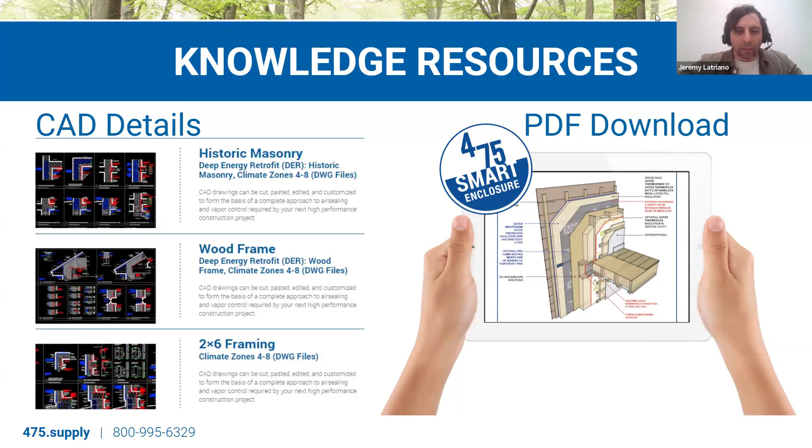Okay, hopefully you guys can hear me. Perfect. You'll see my cell phone here, starting in the conference room, walking out into the main office space.

I mentioned we work with a couple of different European manufacturers to supply skylights here in the US and Canada. The main product we've featured in our new office is Lamilux skylights, which are manufactured in Germany. You can see a large one featured here over our main working space.

The PR60 is a knockdown system, otherwise known as a mullion and transom system. It's delivered to the job site as a kit of parts. This kit of parts includes triple layer insulated glazing, thermally broken aluminum profiles, and insulated flashing connections to the existing structure. It comes together on site to provide a thermally continuous and quite elegant skylight solution.

In this case, you can see that we feature three glass fields, one of which is an operable ventilator flap, which also allows for fresh air to enter into the space. What you'll notice about this space is that on three of the four walls, we share a party wall with the neighboring structures.

And so we weren't really able to utilize many windows to bring in natural light, so we relied heavily on these skylights to do so.

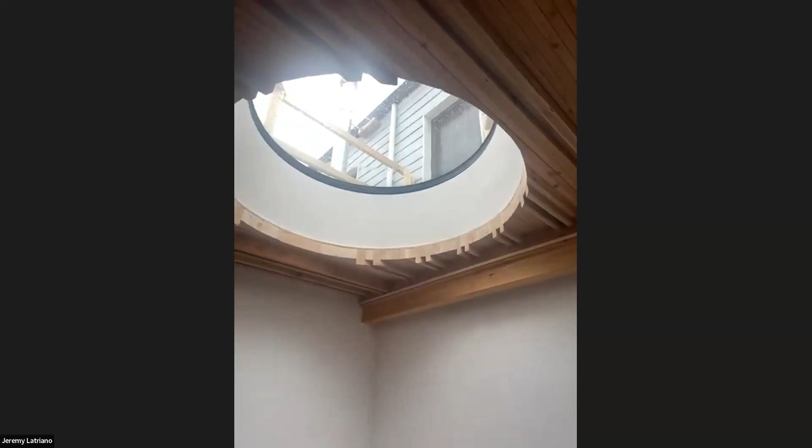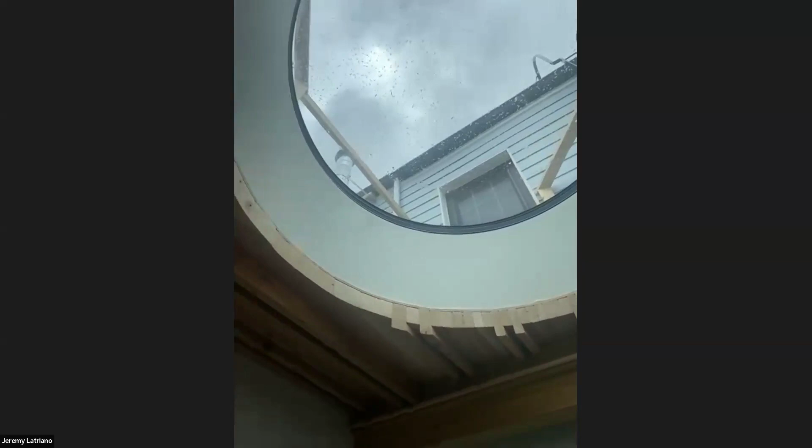As I pivot to the front of our building, you can see here the Lamilux FE Circular, a nice design option for projects that are looking to utilize a circular skylight. You can see this unit skylight comes pre-assembled with triple layer glazing and a thermally broken frame. It also features this insulated curb, which you can see in the white well beneath the skylight. That curb is delivered as part of the skylight assembly, and it allows you to easily install the skylight and detail your water, thermal, and air control to the surrounding structure. I'll talk a little bit more about that detailing in my presentation.

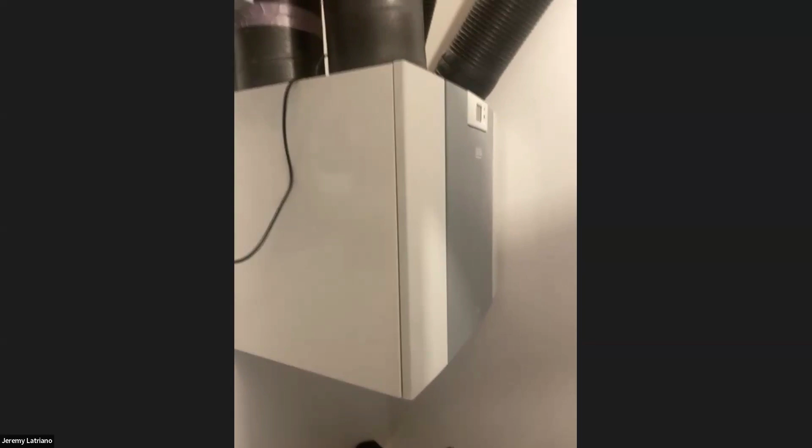Getting away from the skylights here for a second as we move into our mechanical room. Our company doesn't only deal with skylight products. We supply a variety of different solutions to help buildings reduce their energy usage for heating and cooling, and also to improve the comfort and efficiency of their spaces.

This is the Brink Energy Recovery Ventilation System, which supplies air continuously to our office space in spaces such as the areas where we work and our conference room. It also constantly exhausts air from areas such as bathrooms and kitchens, and so we are able to achieve very high indoor air quality. While this system is exhausting air, it's preserving some of the heat from that air in this box, so that as air is being exhausted, we're preserving the heat from that exhaust air. Then when we supply air through these insulated ducts, we can see that the supply air then recovers some of that heat, thereby allowing us to ventilate constantly without having to worry about compromising our energy performance.

Just want to take you downstairs quickly to feature our truth window and some of the materials included in our enclosure. As I mentioned, this enclosure is continuously air sealed and insulated, so we have very low energy usage for heating and cooling, and we're able to quite easily get to net zero energy usage thanks to the PV on our roof. The optimization of the enclosure can be seen here in the truth window, which gives you a little bit of a peek behind our finishes.

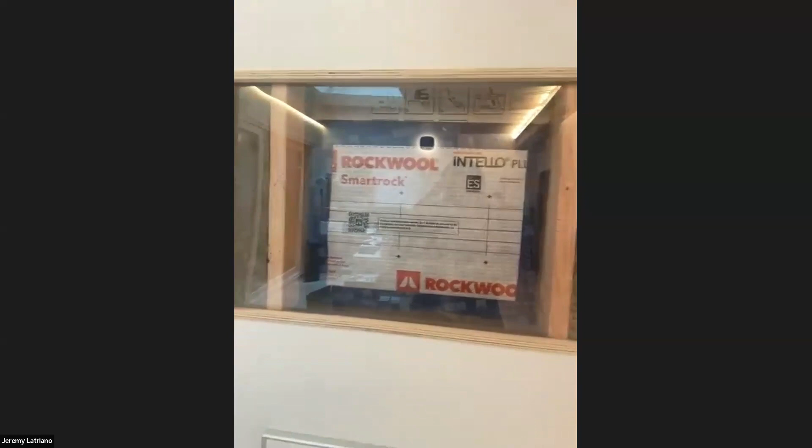Here we show a laminated mineral wool product from Rockwool called Smartrock. This product is one of the newest that we've launched in the US and Canada. It has a semi-rigid mineral wool insulation board with an interior air control and vapor variable membrane laminated to it, so it can be easily installed and then taped at the seams using this blue tape to check off two boxes, insulating and air sealing in one. This is the general principle of how we achieve such high performance via this air tightness, which is continuous via this membrane to the roof where it connects to our roofing membrane, and then also to the slab where it connects to our sub-slab poly.

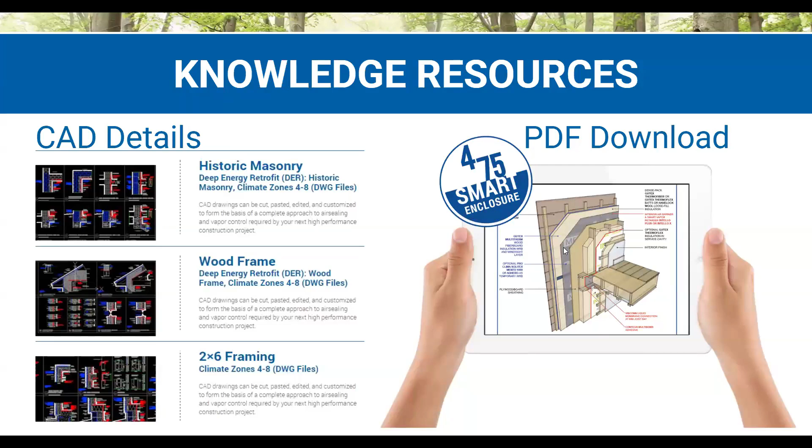Some of the products I highlighted are shown here. Our company is an e-commerce business, so our store is our website, where you can find more information on the products we supply. To summarize, we have the air and vapor control system, supplied primarily from Pro Clima, the manufacturer of the Intello Plus membrane I showed you in the truth window, as well as a variety of other interior and exterior tapes and membranes used to achieve high levels of air tightness and vapor control.

We also supply a sub poly wrap from Stego, so we can help seal all sides of your enclosure. We supply insulation through a German manufacturer, Gutex, who produces wood fiberboard insulation, a rigid board exterior insulation and WRB product with exceptionally low embodied carbon. We also supply the Brink Energy Recovery Ventilation System, a centralized ERV, and we can also do a decentralized through-wall ERV through German manufacturer Lunos.

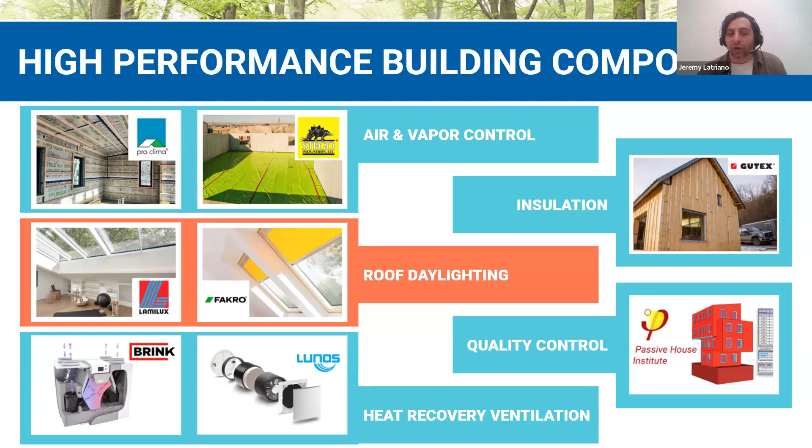The products I'm here to talk about today, and more to discuss general principles around, are our roof daylighting products: Lamilux, which we showed you around the office, and Fakro, a Polish manufacturer of deck-mounted skylights specifically. Since I didn't get to show you those, I'll describe them briefly.

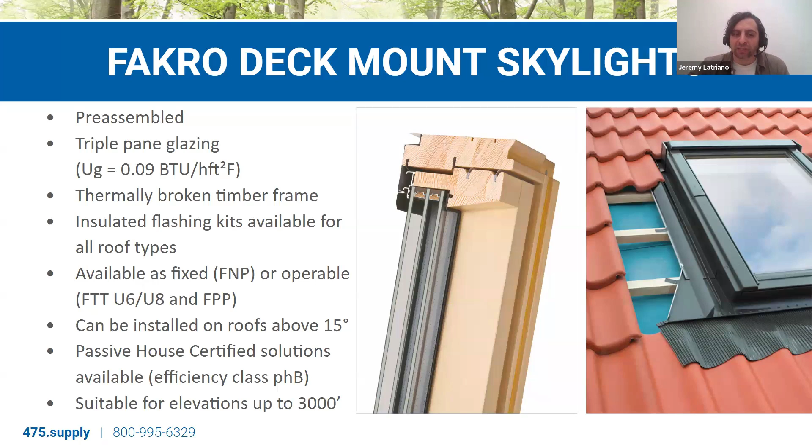While Lamilux is intended for low pitch and flat roof applications, the Fakro skylights we supply can be used in pitched roof applications. These skylights feature a thermally broken timber frame and triple layer insulated glazing. They can be supplied as fixed or operable, and we have some stock options available here in the US. In addition, we can also do walkable skylights through Fakro, also triple glazed with thermally broken extruded profiles, up to about 4 foot by 4 foot in dimension.

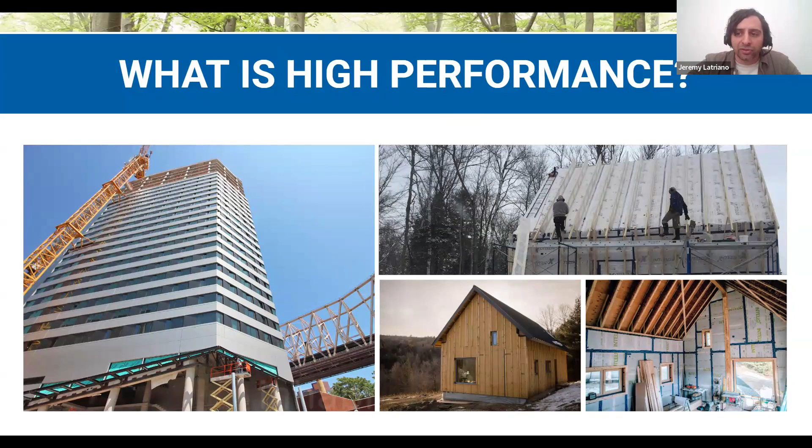Tight envelope, absolutely. Air sealing, particularly, is the most effective way we can reduce mechanical heating and cooling requirements, even more so than insulating. Air sealing also maximizes our comfort as we eliminate drafts, and it's going to improve the durability of our structure as controlling airflow limits vapor movement.

And energy efficiency, yes, that is the big one as well. We talk about all these different characteristics, air control, insulation. One of the big things that we're trying to capitalize on is energy efficiency. When we do achieve very high levels of air tightness and thermal protection, we're actually able to get to a point where mechanical heating and cooling loads are minimized, so that they can be supplied electrically and offset using renewables. So also really good answers there.

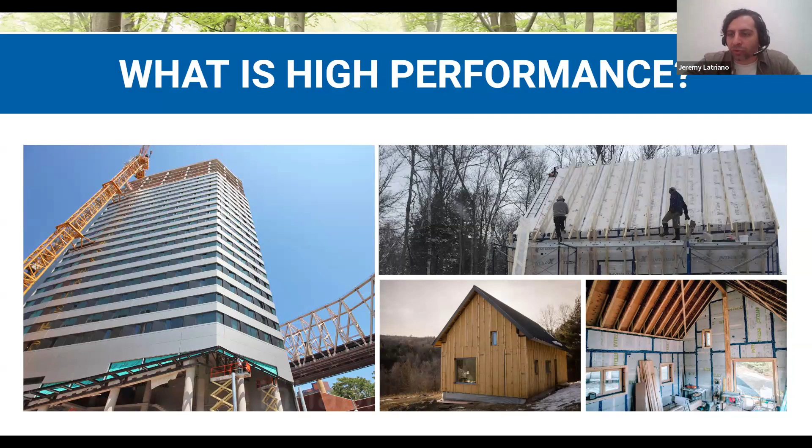Some other things that we as a company consider as essential qualities of a high performance building. The first is comfort. These buildings, high performance buildings in general, are going to be exceptionally comfortable. This is because they embody some of the characteristics that you guys mentioned. They're continuously air sealed, so there's no air leakage, no draftiness, no temperature asymmetry. Similarly, because they're insulated, we don't have any cold spots or any cold surfaces. We'll talk a little bit about the effects that those can have on comfort.

High performance buildings can be very healthy. This is achieved one through material selection. Natural materials with low embodied carbon generally are going to off gas less, have less harmful ingredients, and for that reason will aid in interior health. In addition, because these high performance buildings are continuously ventilated, as I showed you guys with our Brink system, these buildings also provide very high levels of indoor air quality because we're constantly exhausting old stale air and any contaminants or airborne dust that might be floating around our space. And then we're also supplying fresh air, which we can filter and ensure that we have very high indoor air quality.

These buildings are resilient because they manage water, as we mentioned. They also control air and vapor very effectively, and so they're built to last. This is big, as the most sustainable building is an existing building. So we want to be building our structures to last for 100 years or more wherever possible.

This one's a little bit maybe controversial, but we like to think that these buildings can be affordable, particularly air sealing, which, as I mentioned, has a very disproportionate effect on energy usage and comfort, and can be added to most buildings without creating a significant impact on budget. And all these principles that I've mentioned can be applied to buildings of virtually any geometry, any design. So there's no reason why these buildings can't be beautiful. I think with sustainable buildings, sometimes we get caught in this trap of thinking that they have to appear a certain way, they can't be designed as flexibly. But in reality, the principles I'm going to talk about today are not limited by design, generally speaking.

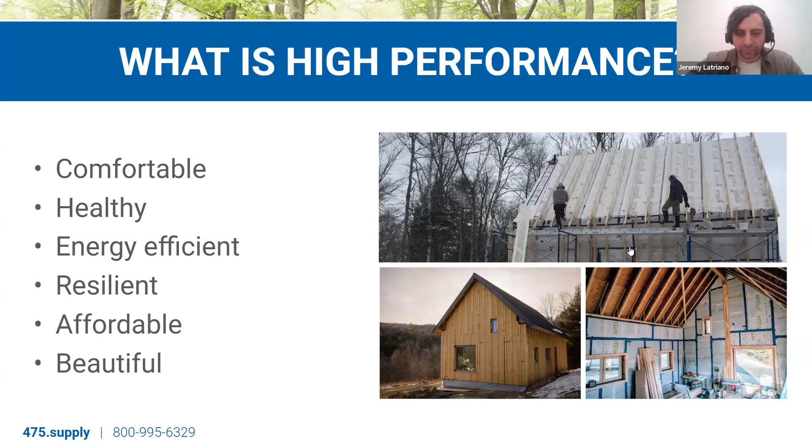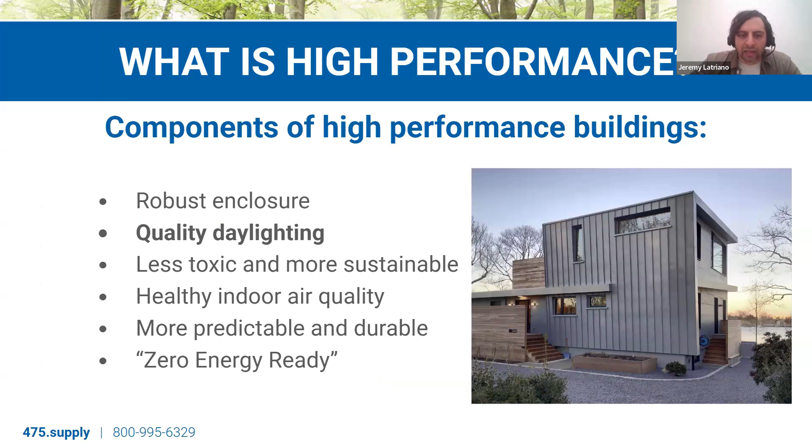So just to put some of these qualities into definition: quality daylighting means that first we have a balanced window to wall ratio.

Anytime we have a penetration in our enclosure, whether in our roof for a skylight or in our wall for a window or door, we are inherently creating a thermal weakness and an opportunity for air leakage. So we want to be very considerate of how we're detailing our windows, minimizing the overall glazed surface area while still providing the natural light and heat these windows provide, in order to minimize the impact on our overall heating demands.

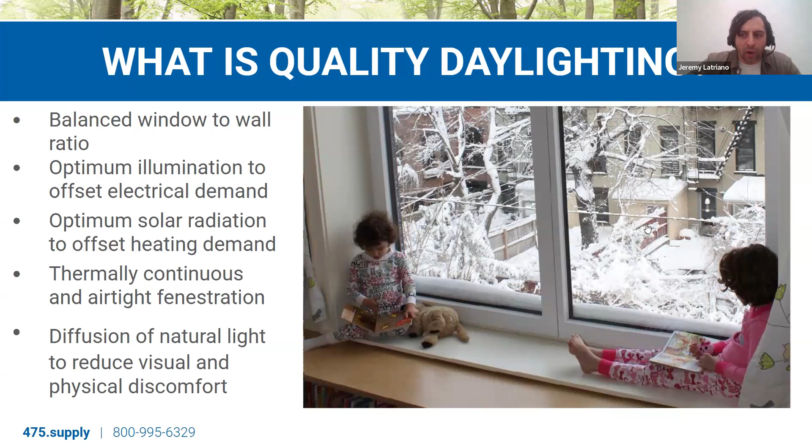We have an answer here in the chat. Mick said no. Thanks, Mick. Why would you say that it's not an effective example of quality daylighting?

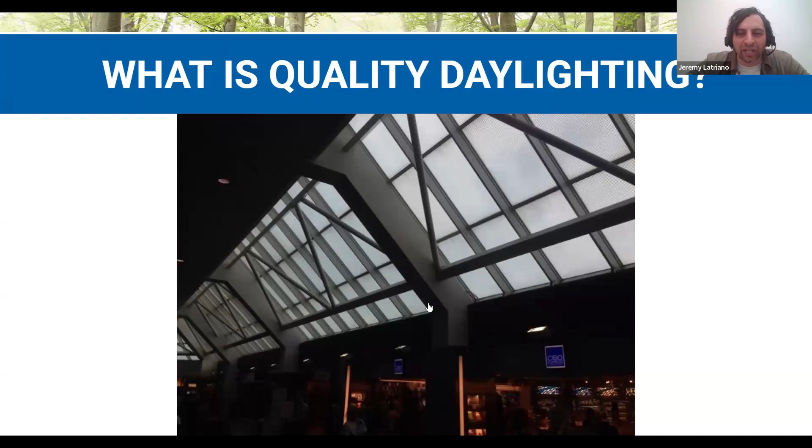I would say this is not an effective example of quality daylighting for a few reasons. One of the primary considerations when designing for daylighting is the window to wall ratio. In this case, the enclosure has been opened up significantly to utilize this sloped skylight throughout a significant portion of the overall enclosure surface area. For that reason, we know the thermal performance of this enclosure is going to be compromised, because the skylight is definitely not going to provide as low a U value or as high an R value as the surrounding opaque structure.

Despite opening up so much of our enclosure for this skylight, it's not necessarily providing adequate illumination to offset the requirement for electrical lighting in the commercial spaces beneath it. So we've compromised the thermal performance of our enclosure, and we're not really getting the benefits of that penetration we were seeking. So no, probably not a great example of quality daylighting based on the definition we just made and this specific photograph.

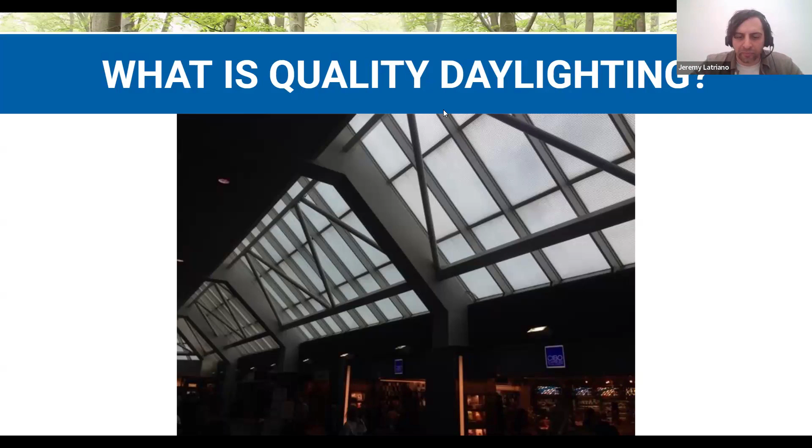So what are some of the benefits of daylighting? Improved health and productivity is certainly one. When we have access to natural light in our day-to-day office spaces, we feel better physically. Natural light reinforces our circadian rhythm, which helps us feel energized during the day and sleep better at night. Students with access to natural light during exams tend to perform better and are more attentive.

Even shoppers in retail locations with natural light tend to spend more time in store and spend more money on product. This is one, because the natural light provides a more pleasant shopping experience, and two, because natural light allows for the full spectrum of visible light to be perceived, allowing shoppers to more accurately visualize the colors of the products. This full spectrum of light is also a great design tool.

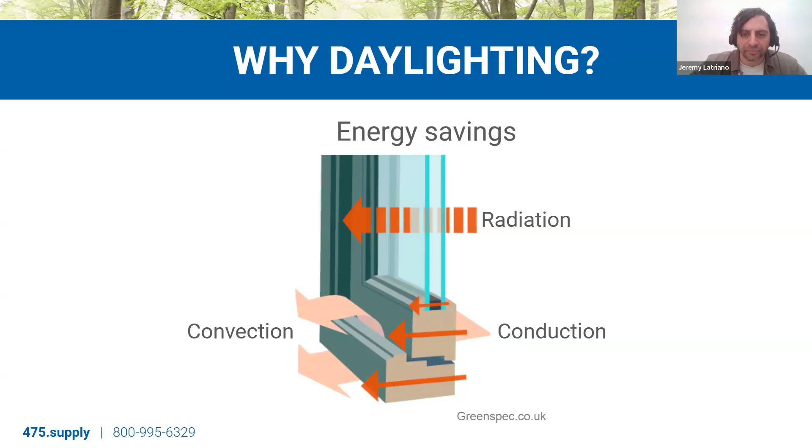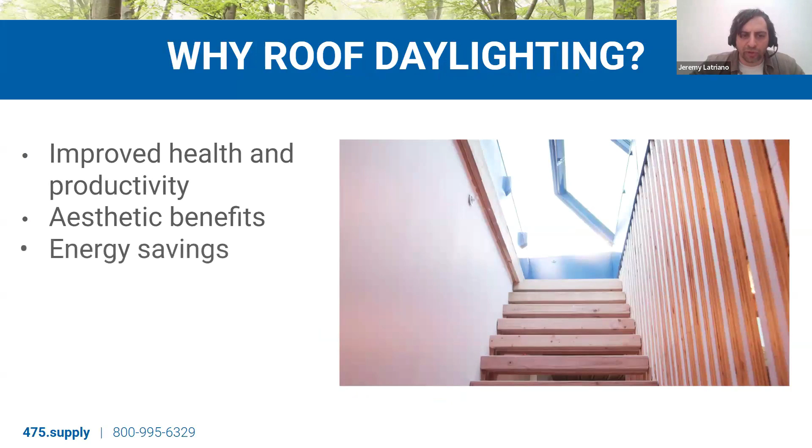So why roof daylighting specifically? Roof daylighting, because of its orientation to the open sky and to the sun, is ideally positioned to capitalize on some of the benefits I already discussed: improved health and productivity, aesthetic and architectural benefits, and energy savings via reduced electrical loads and solar gains.

Skylights are also ideally positioned to take advantage of natural ventilation. I'll talk about this a bit later, but skylights, when opened, can capitalize on the benefits of natural ventilation via the stack effect, and can also allow for ventilation during shoulder seasons, which can minimize our heating and cooling requirements.

Skylights also allow for exterior access, which is particularly relevant in urban environments where we might be limited in terms of how much private outdoor space we have. Skylights open up access to roof decks and green roofs, which is otherwise difficult to access.

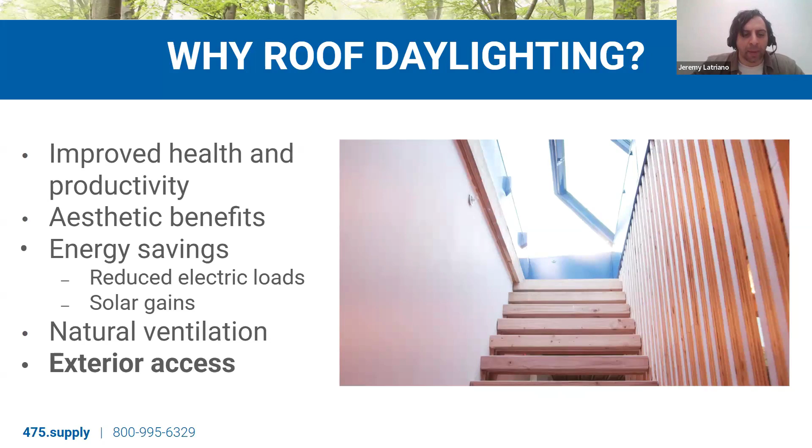Looking closer at the relationship between skylights and windows: windows mostly provide indirect daylight throughout the day and year due to their orientation. Because skylights face the open sky and receive so much more direct daylight, they can be 3 to 10 times smaller than windows while still providing similar amounts of light.

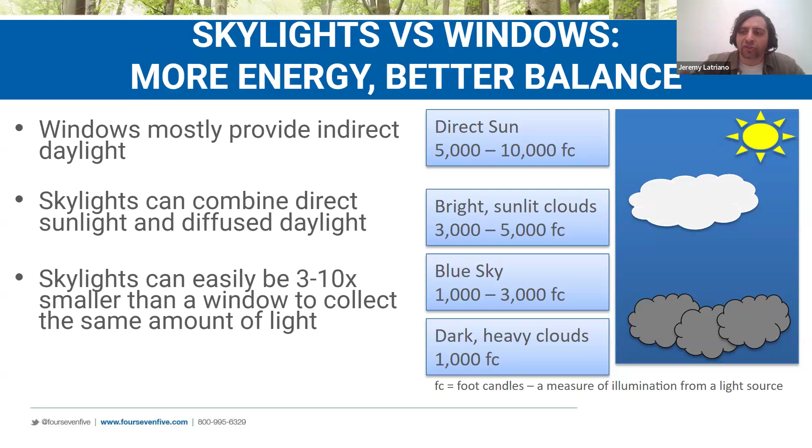However, when we consider that office work typically requires between 30 and 100 foot candles to complete comfortably, we can assume that a skylight exposed to even a dark, heavily clouded sky will still provide illumination that significantly offsets our reliance on electrical illumination.

As a rule of thumb, we can generally assume that light will penetrate through a window about two times the head height of that window.

So skylights do allow us to bring light into spaces that might otherwise be hard to reach and allow us to achieve even distribution of natural light.

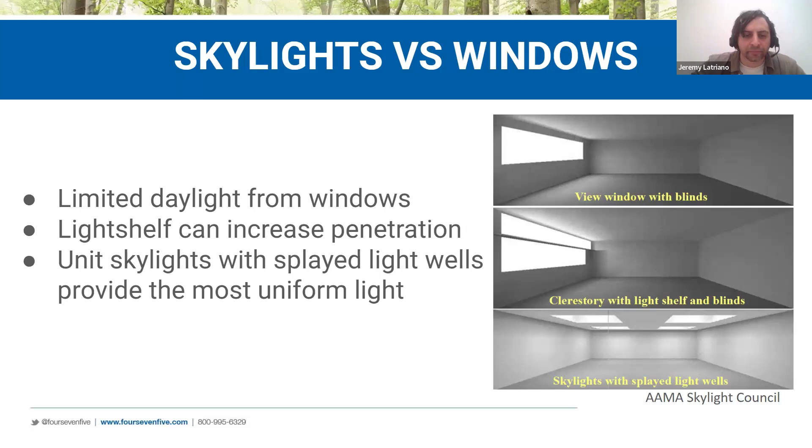However, skylights in particular come with a whole suite of problems, generally speaking. When working with contractors, they're often quick to bring up some of these problems, and they're often reluctant to put a hole in their roof for a skylight because these problems have occurred in the past. Some of the problems we hear about most frequently are glare and summer overheating.

Because skylights are oriented towards the sky and receive so much direct daylight, they are particularly susceptible to over-illumination, i.e., glare, or overheating, particularly in summer months when we're receiving more radiation than we would like, and we have to offset that via mechanical cooling.

In addition, skylights, because of their position on the roof, are particularly susceptible to winter heat losses. If we have a skylight solution that is not thermally broken or continuously insulated, the heat we generate in our interior space rises and comes into contact with the interior surface of that skylight, and is then transferred outward. We have to make up for that lost heat via additional mechanical heating and energy.

And then finally, skylights are also susceptible to condensation, again particularly relevant in heating season or the winter months. Condensation typically occurs when we have very cold exterior temperatures and our skylight solutions are not thermally broken. We can see the interior surfaces of those skylight solutions become quite cold.

As our warm, moist air from the interior, which we're heating and generating a lot of moisture into, particularly in winter when we're spending time inside cooking, cleaning, showering, breathing, comes into contact with the cold interior surface of the skylight, that moisture can actually condense and drip down to the space below. This is commonly perceived as a leak, but more often it's skylights creating condensation due to their lack of thermal protection.

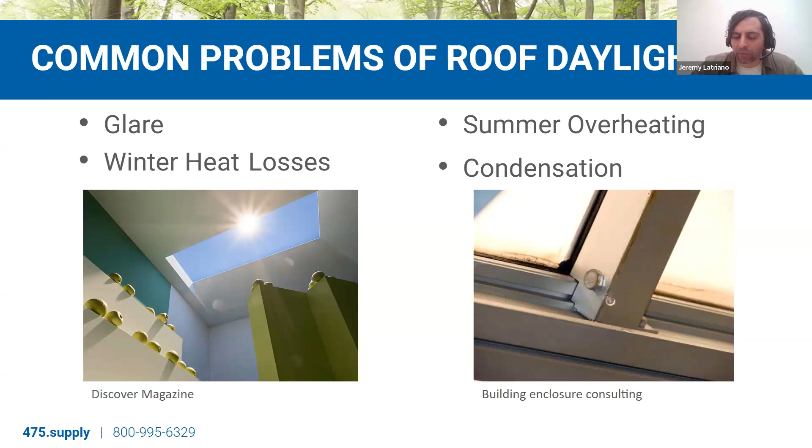So what's happening here is that because the skylights are not continuously insulated and not thermally separate, we have very warm exterior temperatures, probably also a lot of sun exposure, and the heat from the exterior is being transferred through the skylight or window assembly to the interior. The interior surfaces of the skylight and windows become much warmer than the interior air temperature, and they actually radiate that heat inward. So it feels like a radiator's on, but in reality it's just thermal asymmetry created by the lack of insulation in these skylights and windows.

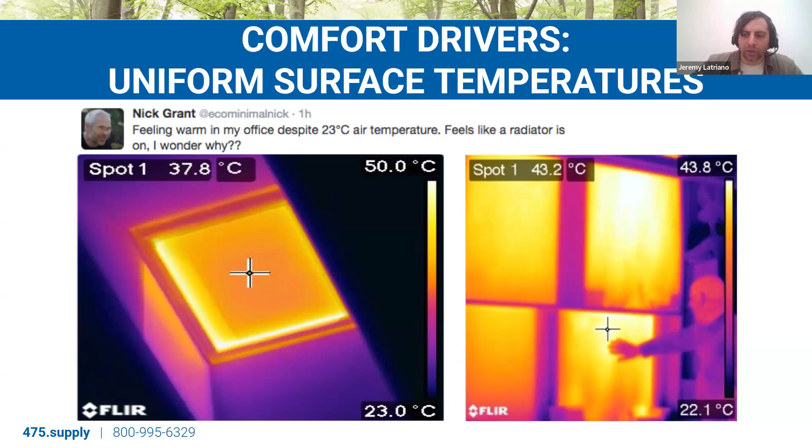When we have this big gap in temperature between the air temperature and the surface temperature, what we can see occur is that our warm interior heated air will come into contact with the cold interior surface of the window. It'll cool and sink, and more warm air will rush in behind it into the vacuum that it creates. That phenomenon of cold air circulating creates a feeling of draftiness, which is not due to an air leak, but actually just due to a lack of insulation.

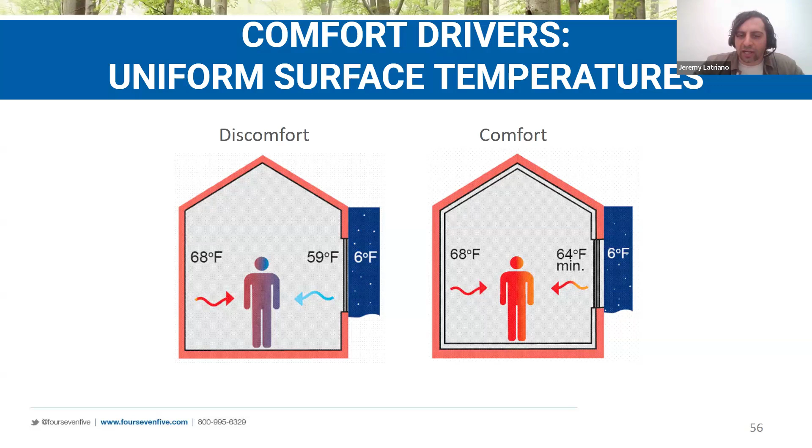If you live in an old, maybe mid-century multifamily building, you may notice that radiators are commonly located underneath windows. This is generally due to the phenomenon which we described here. The radiator is actually intended to warm that interior surface of the window and minimize the effects of thermal asymmetry.

So in addition to even temperature distribution, we also want to ensure even light distribution. This would be the most effective way to reduce our reliance on electrical illumination. And it'll also aid in visual comfort, particularly for tenants that might be visually impaired or hard of sight.

Thank you, Nick. It looks like the shades are pulled, is what Nick mentioned in the chat. Yes, that's exactly what we are looking to emphasize here.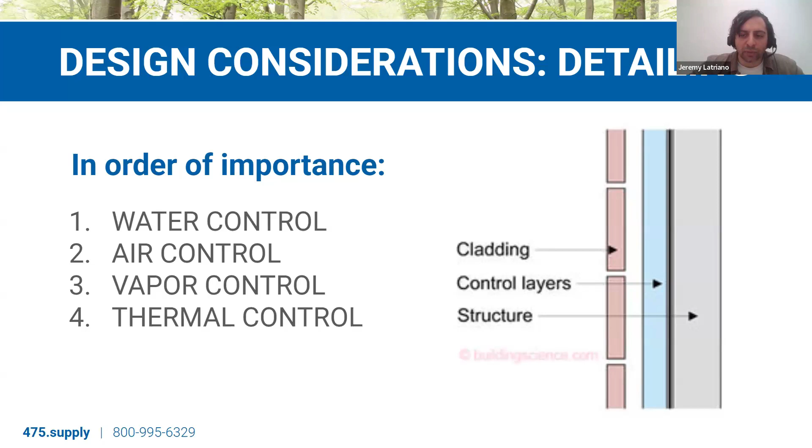Control layers can be further broken down into the four control layers you see here on the left, which in order of importance are water control, air control, vapor control, and thermal control. Skylights, windows, and doors, as I mentioned, are unique and they're really the only components in our enclosure that are going to be providing for all four of these control layers. And for that reason, as designers, we need to be really considerate of how we're detailing the connections of these control layers from our enclosure to our fenestration.

So when we are detailing the control layers, we want to be considering first how we're going to connect our water control at the roof to our watertight skylight assembly.

Here we can see a skylight assembly that features a thermally broken frame, thermally broken via its insulation. We can also see it's triple glazed, so we can be fairly confident that this skylight assembly is thermally continuous.

We're assuming when we purchase a skylight that it's watertight. This skylight is mounted on an insulated curb, so we want to connect the water control in our roof to this watertight assembly. This curb makes it simple, as we can run the roofing membrane from the roof up the side of the curb and attach it to the skylight assembly, ensuring continuous water control over that penetration.

For air control, we're detailing at the interior. Again, we're assuming our skylight assembly is airtight, so all we need to do is detail the connection of our air control layer in the enclosure to the airtight skylight. Here we see a red membrane, an Intello Plus membrane or something similar, which runs behind our trim up the light well and then connects to the bottom of our skylight via some adhesive or tape.

Vapor control isn't really a concern since there's not much vapor moving through our fenestration assemblies, but thermal control is definitely critical. So we want to ensure that our thermal control layer in the roof is aligned with the thermal control layer in our skylight.

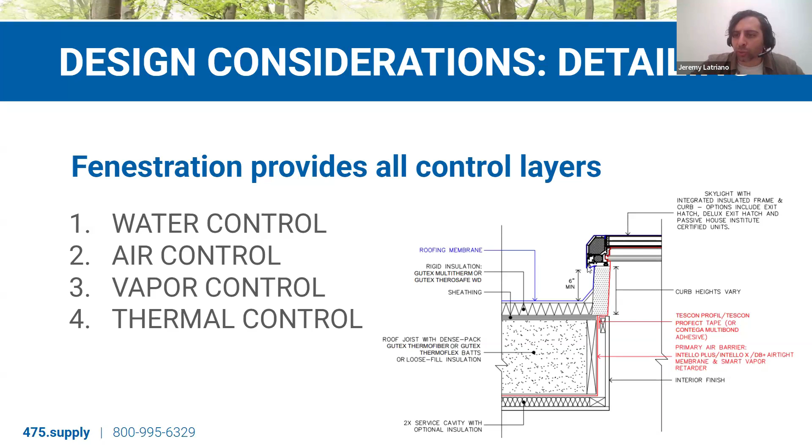When it comes to thermal control, placement is really important. Here we're looking at a window, but the same concept applies to skylights.

For this example, we'll assume we're looking at the same wall assembly in each of these three images, with the insulation layer, or thermal control, centered in the assembly. Ideally, we want to align the thermal control layer in our window assembly, assuming that product is thermally continuous, with the thermal control in our wall. In the middle image, we can see that's the case.

These images are each a thermal model, representing different temperature strata using different colors: cooler exterior temperatures in blue and green, and warmer interior temperatures in red and orange.

In this middle, just-right example, we can see the red is continuous at the interior and the blue is continuous at the exterior. There's not much blending or kinking of colors, and the colors aren't moving through the assembly or window, which would indicate heat transfer is occurring. So we can be relatively sure thermal control was detailed effectively and that we have continuous thermal control over this penetration.

In the image on the right, we see some thermal bridging as we moved our window out of alignment with the thermal control layer in the wall. So we'll experience some heat transfer around the window between the wall insulation and the window itself, shown by cooler temperatures at the interior corners of the window where heat is being lost.

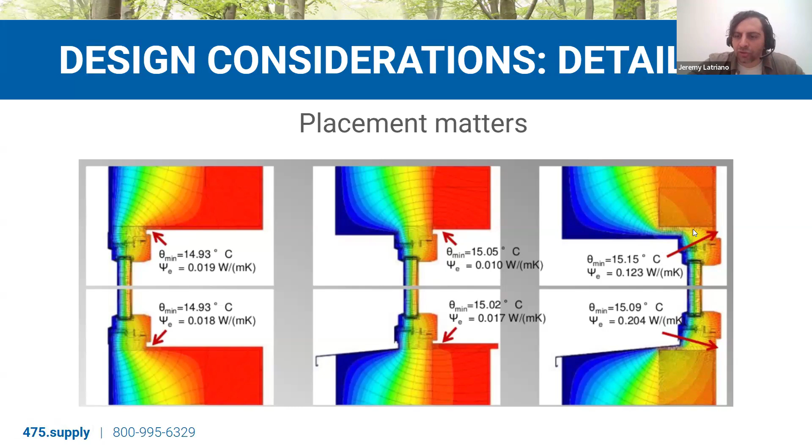The same concept would apply to skylights. We want to ensure that the insulation in our roof, the thermal control in our roof, is aligned with the thermal control in our skylight.

Here we can see a skylight assembly similar to what we looked at earlier, triple layer glazing and a thermally broken frame. For the most part there's not any thermal bridging occurring, perhaps a small thermal bridge here at the corner where we see some cooler temperatures.

From the roof to the skylight assembly, we can see that the exterior insulation in our roof assembly is aligned with the insulated curb. For that reason, we have very nice isotherms running continuously from roof to skylight.

So the simplest way to ensure that we are detailing effective thermal control from roof to skylight is to utilize the thermally continuous solution. Once we have done so, all we need to do is align the skylight with the thermal control layer in our roof structure.

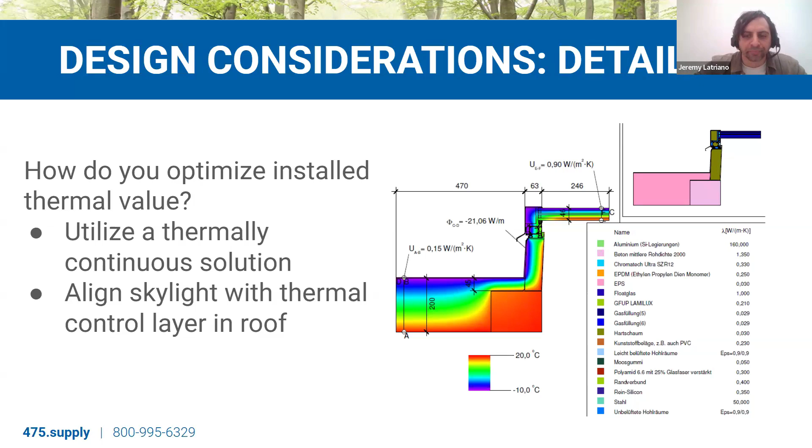Many skylights aren't going to be supplied with an insulated curb as part of their assembly, as we looked at in these last few examples, but the same concept can be used for skylights built on a site-built curb.

In this case, the site-built curb consists of a stud cavity continuously insulated, and again we have a thermally continuous skylight solution, so very little heat transfer occurring in the roof or in the curb. Because the insulation in the curb is aligned with the insulation in the skylight frame, there's again very little heat transfer occurring at that joint. This is a well-detailed solution, something we would consider high performance.

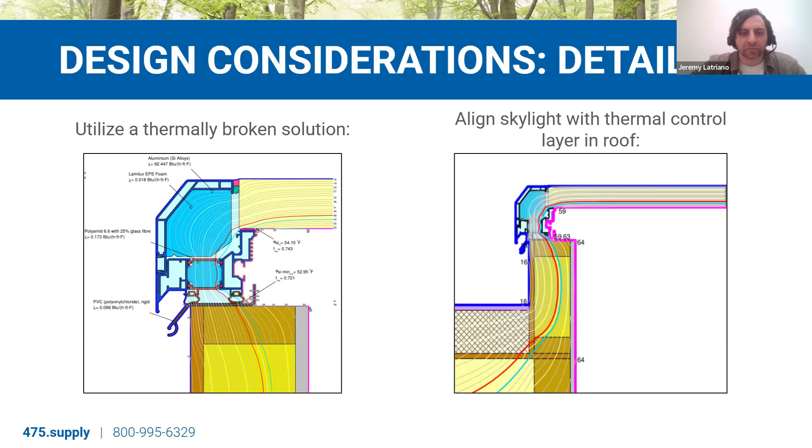Moving into our second design consideration, which is daylight modeling. There are a couple different ways that we can model illumination throughout a space. The two examples I'm going to give are also useful for achieving LEED accreditation for natural illumination and offset of electrical demands. The first tool we have at our disposal is spatial daylight autonomy.

Spatial daylight autonomy is a spatial modeling tool that can be used to demonstrate how much natural light is being received throughout the floor area of a building. We can see in these four images that there is light distribution indicated by different colors. The amount of hours throughout the year that a space is receiving natural light is indicated by these different colors.

For spatial daylight autonomy, we're trying to provide adequate illumination for as much of the space as possible. In order to achieve LEED credits via spatial daylight autonomy, we want a satisfactory result, meaning that at least 55% of the space is receiving at least 300 lux of daylight illumination for at least 50% of the operating hours each year.

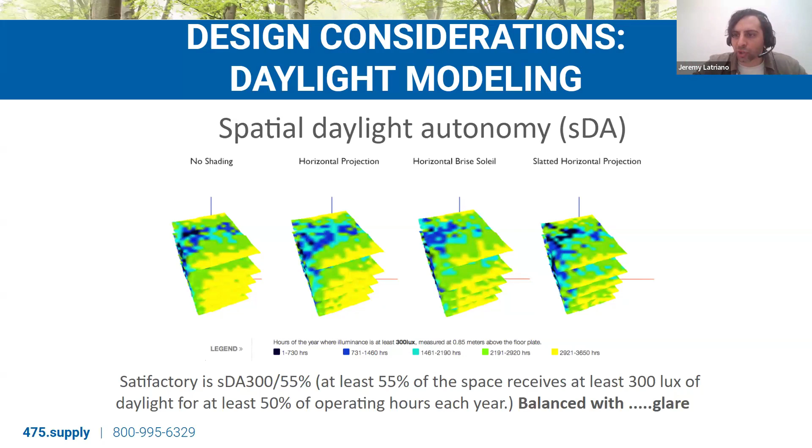However, we also want to ensure that while we are providing adequate illumination, we're not over illuminating. We want to minimize those issues with glare and overheating that we mentioned. So the other tool we have is annual sunlight exposure.

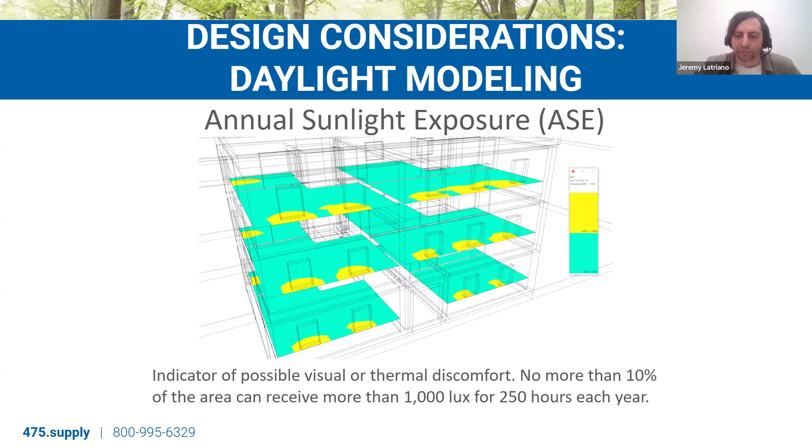Annual sunlight exposure can also be used to achieve LEED credits. Here we are also measuring the amount of light received throughout the floor area of a space throughout the year, but we're looking to eliminate problem spots where too much light might be occurring. So a satisfactory result for annual sunlight exposure would be that we want no more than 10% of the floor area in a space receiving more than 1,000 lux of illumination for more than 250 hours each year.

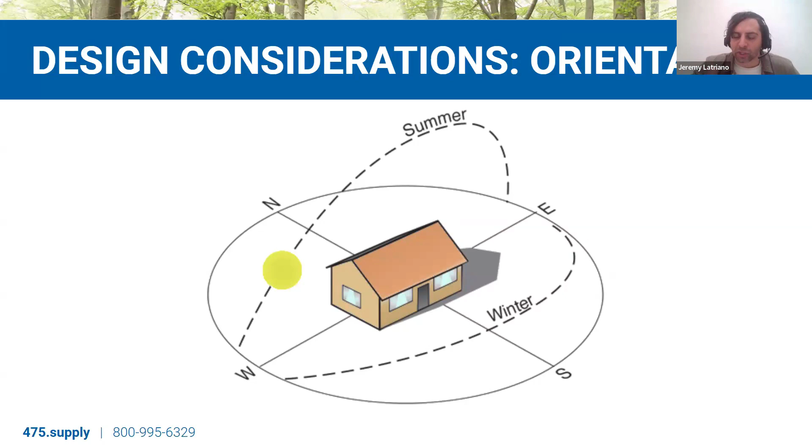A very simple design consideration, but one with a huge impact on how much light and how much heat we receive from our roof daylighting elements, is orientation. We know we're in the northern hemisphere; the sun is in the southern horizon throughout the year, higher in summer and lower in winter. We can use these patterns, as well as any site-specific conditions such as neighboring buildings or trees, to ensure that we are locating our skylights appropriately, and that we're selecting the right glass type for the right locations to minimize or maximize heat gain, depending on how much direct daylight we're expecting to receive throughout the year.

Spacing is another critical design consideration, both in terms of limiting our window-to-wall ratio, but also in terms of providing even illumination and minimizing potential visual discomfort or our reliance on electrical illumination.

As a general rule of thumb, or a starting point for designing with skylights, we want to be spacing our skylights about 1 to 1.5 times the ceiling height of the skylight, center to center in both directions. However, this will vary significantly based on a variety of different factors.

One, the skylight type, specifically the glass type and how much light it lets in. The depth of the light well or curb and its splay will affect how that natural light is reflected into the interior and how deep it penetrates. And any furniture, shelves, interior partition walls, obstructions, or any element that might reflect or block light should also be considered when spacing skylights.

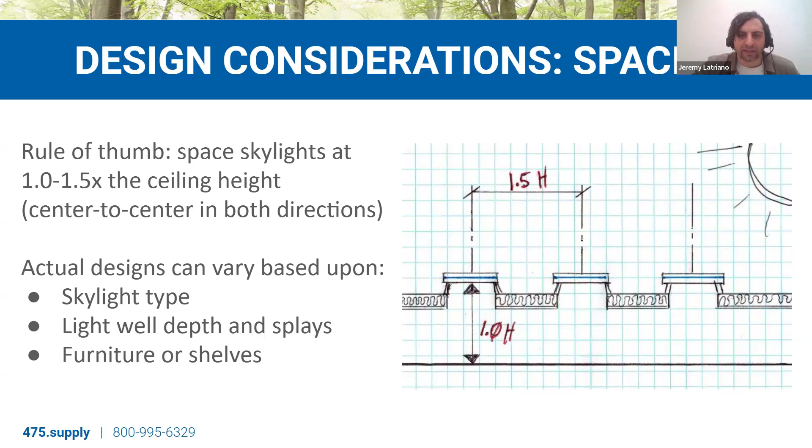So now that we've talked a little bit about design considerations, I want to cover a few product considerations, things we can be thinking about when selecting skylight products. And then I'll wrap up with a quick energy balance exercise and get you guys out of here.

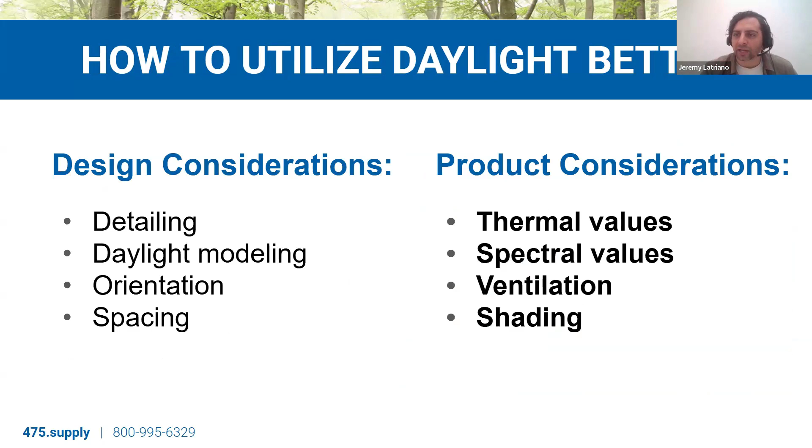So the first product consideration I want to bring up is thermal values. We've talked a lot about thermal continuity and about continuous insulation. Generally speaking, the thermal performance of a window or a skylight is measured by its U value, being the inverse of the R value. So a lower U value means better thermal performance.

The U value for a window consists of not only the U value for its glass, but also the U value for its frame and the psi value of its spacer, because heat transfer can occur between the glazing and the frame itself. The spacer, which is the element that runs around the perimeter of the window between the glass panes, is critical to ensure that we are minimizing heat transfer at that joint.

So we want to be choosing fenestration that has what we call a warm edge spacer, which is a spacer made from a non-conductive material. And because that element is linear in terms of how it transfers heat, we don't use U value, which is a measure of thermal transfer based on surface area or based in two dimensions. So the U value for a window or a skylight is going to be the weighted average of the U value for its glass, its frame, and the psi value of its spacer.

Generally speaking, the U value of the glass is always going to be lower than the U value for the frame. So larger windows with more glass surface relative to the frame surface are going to generally perform better than several small windows where the frame represents a more significant portion of the overall window assembly.

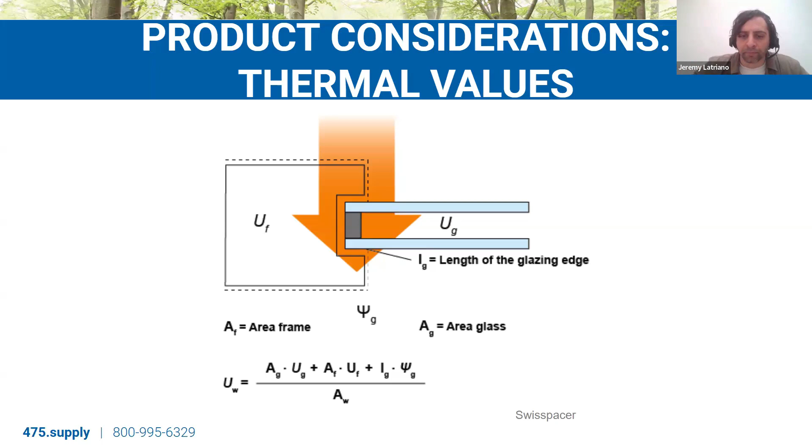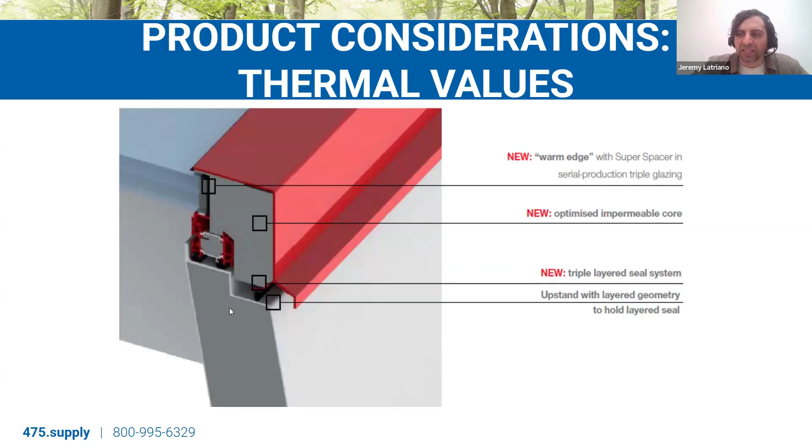So what does this look like in terms of skylights? Well, a thermally continuous skylight, or a skylight with an exceptional U value, would probably look something like this. Here we can see triple layer insulated glazing, going to provide excellent UG values. We can see a warm edge spacer, again minimizing heat transfer between the glass and the frame. The frame, which is continuously insulated, we can see there's nothing penetrating this insulation, so we can assume that we're minimizing heat transfer through the frame. And then the skylight is also mounted on an insulated curb, which, as we saw earlier, makes it really easy to detail thermal control with the surrounding roof structure.

What would a skylight that's not thermally continuous look like? Well, it might look something like this. Again, we're looking here at a thermal model of a skylight assembly. In this case, we can see that our interior surface temperatures are not staying quite as warm as we might like. We're not seeing much of that red or orange, particularly at this joint between the skylight and the curb. We can see that there's significant blending of colors, or kinking of colors, an indication that there is a significant thermal bridge and a significant amount of heat transfer occurring at that point.

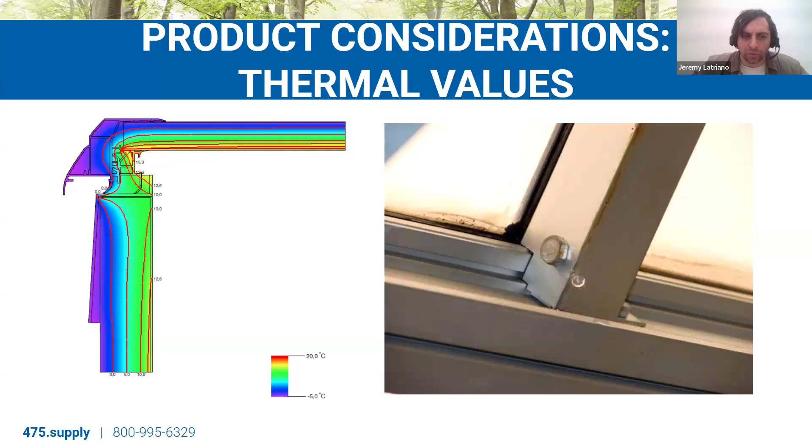When we do have thermal bridging, such as what we see here, that's when we are at risk of condensation. So in the winter months, when that heat transfer occurs outward, the interior surfaces of the skylight will become quite cold. And as we generate moisture at the interior, and that moisture comes into contact with the cold surface of the skylight, we can see water form.

So in addition to thermal values, we also need to be considering our spectral values for skylights, which are the values of the glass, or the way that it portrays or allows visible light and heat. Visual transmittance is one spectral value, which measures visible light, or the amount of illumination we receive through a glazed surface. And then we have solar heat gain coefficient, which is measuring the amount of radiation or solar heat that we're receiving to that glazed surface.

Generally speaking, we want to be aiming for a ratio between visual transmittance and solar heat gain of around 2. That'll be an indication that there's a low E coating used in that glass, which is going to allow us to maintain our visual transmittance while reducing our solar heat gain.

The ideal combination of visual transmittance and solar heat gain in a heating dominated climate has us optimizing diffused daylight. We want glass with a high visual transmittance and solar heat gain so we can offset our heating demand in winter. But we want to combine that highly transparent glazing with orientation as well as shading solutions so we can block light and heat when we don't want it.

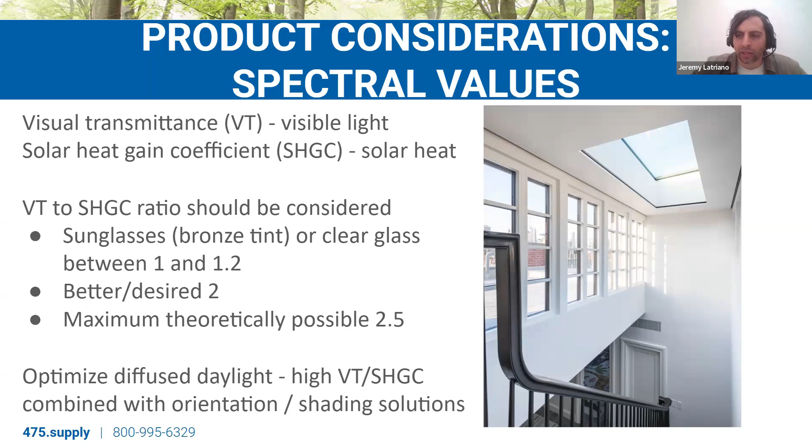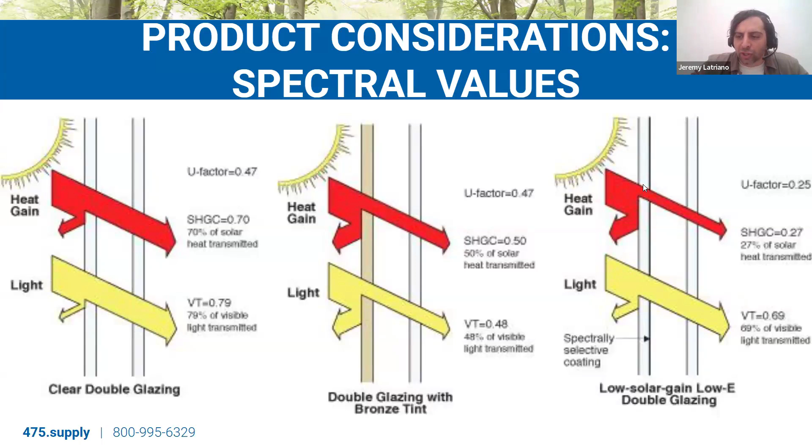Some final design considerations: one, ventilation. As I mentioned, skylights are ideally positioned to capitalize on the benefits of natural ventilation, one being nighttime flushing, particularly relevant in shoulder seasons when we have cooler temperatures at night than the much warmer temperatures we're experiencing during the day.

During the day in the shoulder seasons, we have light shining through our skylights. All the materials and fixtures in our office or home absorb that light and heat, and then at nighttime they release it back into the air. During that period at nighttime, we can open skylights to allow that heat that was absorbed during the day to ventilate to the exterior. Then when we come in the morning, we can minimize the impact on our heating and cooling systems needed to offset that heat.

In addition, skylights are ideally positioned to capitalize on the benefits of the stack effect, the tendency of heat to rise in our buildings and escape through penetrations. The stack effect occurs particularly in taller buildings where heat gets pulled to upper stories and escapes through air leaks. As that air moves upward, it creates a vacuum on the lower stories, so as we're entering or exiting the building, more air is being pulled in from the exterior.

However, when we allow this stack effect to occur naturally by opening our skylights and allowing air to move through, we can experience some of the benefits of that natural ventilation, which could be used particularly in the cooling season to offset cooling demand.

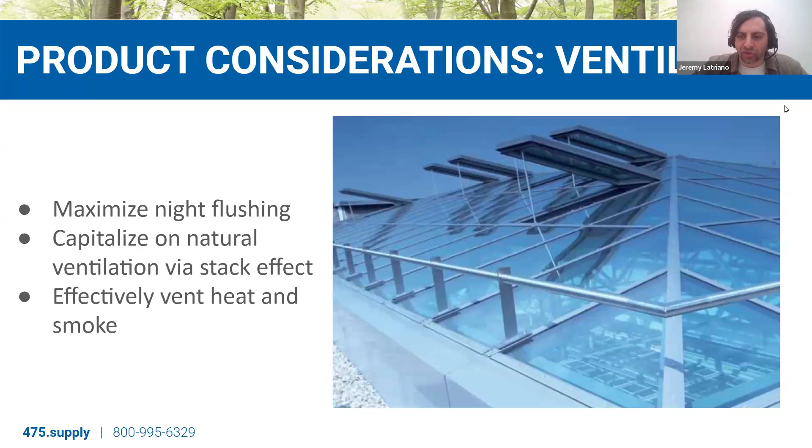Final product consideration is shading or diffusion. Ideally, wherever possible in a high performance building, we want to be utilizing exterior shading, motorized solutions where possible. Exterior shading is going to block heat before it ever has a chance to enter our interior space, so we won't have to generate any mechanical cooling to offset the effects of that heat.

Interior shades are definitely better than no shades, but generally speaking they're only going to block heat once it's already entered the space, so once it dissipates out from behind the shade and spreads throughout the interior, we will have to offset it with mechanical cooling. Here we can see fritted glass, which features a printed or digitally created ceramic frit, which is going to block glare consistently throughout the year based on the size and pattern that is selected.

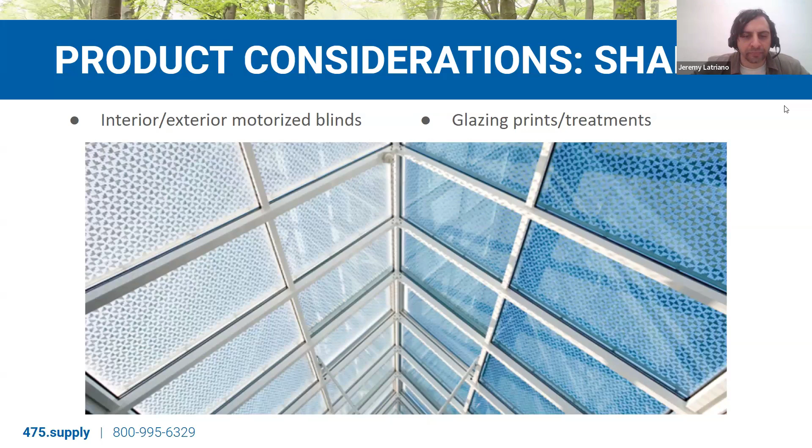For this example, we're going to be looking at the energy balance in this beautiful rectangular prism of a building, masterfully created in MS Paint. We're going to assume our building footprint is 200 foot by 200 foot, featuring 36 skylights shown at the roof, each 38 inch by 38 inch. That represents a total glass area of about 323 square feet, or less than 1% of the overall building envelope. In this exercise, we're going to see the effects of these skylights on the overall heating demand and then cooling demand of the building.

As we mentioned in the beginning of the presentation, heat transfer occurs through skylights in three ways. It occurs via convection, or air transfer, if our skylight is not airtight. It occurs via conduction, or heat transfer through material, if our skylight is not well insulated. And it occurs through radiation, which is light captured from the sun through the glazing surface.

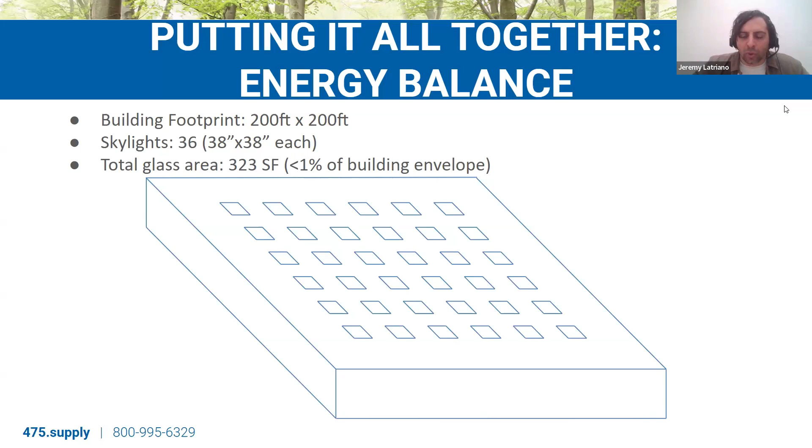So radiation is going to provide heat. Convection and conduction are going to allow heat to escape in the heating season, or to enter in the cooling season. So I'm going to flip to this next slide and show you guys a quick chart.

Here we can see heat losses and solar gains through our skylights based on different skylight assemblies. So in the column on the left, we have what we would consider a low performing skylight. And as we move to the right, we're improving the skylight using some of the characteristics that we defined earlier in the presentation.

So we'll start with this double pane skylight on the left, which we can see is not thermal bridge free. It does not have an insulated curb. It has a relatively high U-glass value. And so we know that our heat losses are going to be significant during heating season because we're going to be losing heat outward via conduction, since we're not thermally continuous. We are still getting some solar gains through the glazed surface, which will offset our losses, but they're not significant enough to offset them completely.

As we improve the performance of our skylight, moving to a triple pane solution with a conventional spacer, and then a triple pane solution with a warm edge spacer, we can see that we're actually able to reduce our heat losses via conduction, thanks to that insulation and improved glazing. Eventually, when we have what we consider an advanced or high performance component, we can reduce our heating losses to a point where we can actually offset them with the solar gains we're receiving from the sun.

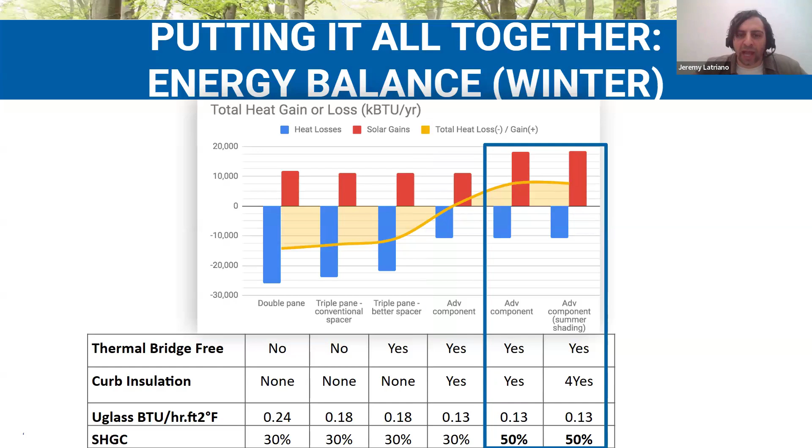Furthermore, if we go from this thermally continuous assembly and then add a higher solar heat gain coefficient glazing, we can actually increase our solar gains and get to a situation where we're providing more heat via radiation than we're losing via conduction. This is what we would consider, or what we call, free heat in the passive house world, as we're able to actually offset our mechanical heating requirements using this heat from our skylights.

So this table represents the same data that I described previously on the chart on the last slide. Again, from top to bottom, each skylight assembly we looked at with varying characteristics. What we can see is that in the topmost column, boxed here for you guys, our double pane skylight that's not thermal bridge free, with a relatively high U-glass value, has heat losses greater than our solar gains, and so we have a net negative impact on our heating demand.

We remember from the earlier slide that skylights represent less than 1% of our overall building enclosure, but we can see that in this case, they are representing a 7% spike in heating demand, so not great.

As we improve the thermal performance of our skylight, we reduce the heat losses while maintaining the solar gains, and we can actually get to a point where the heat losses are offset by the solar gains, and then the skylights have a net neutral effect on the overall heating demand.

We then raise the solar heat gain coefficient to 50% in these bottom two rows, and we can see that we're actually able to get to a point where our solar gains are greater than our losses, and we actually have a net positive effect on our heating demand.

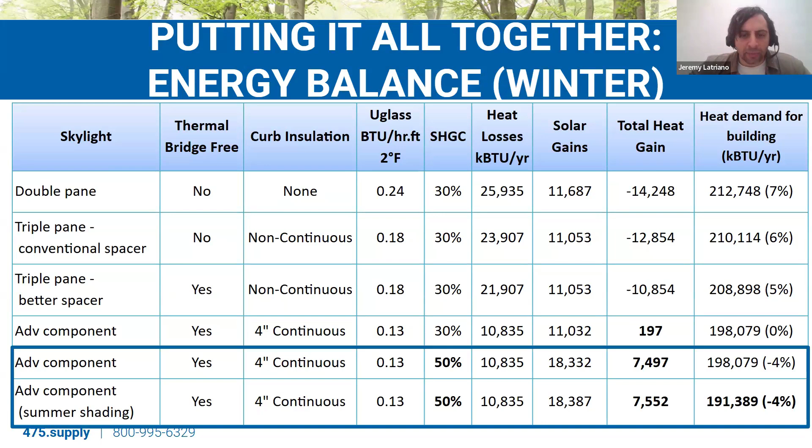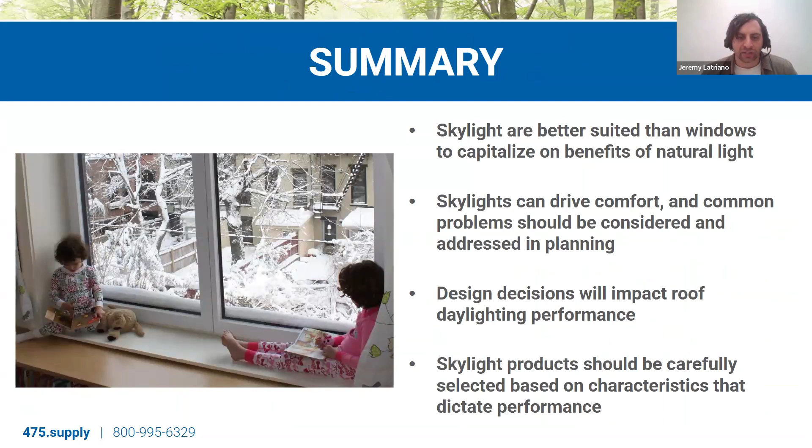And thanks again, Mike. Appreciate you helping me get set up here. Appreciate it, Jeremy. Thank you so much.